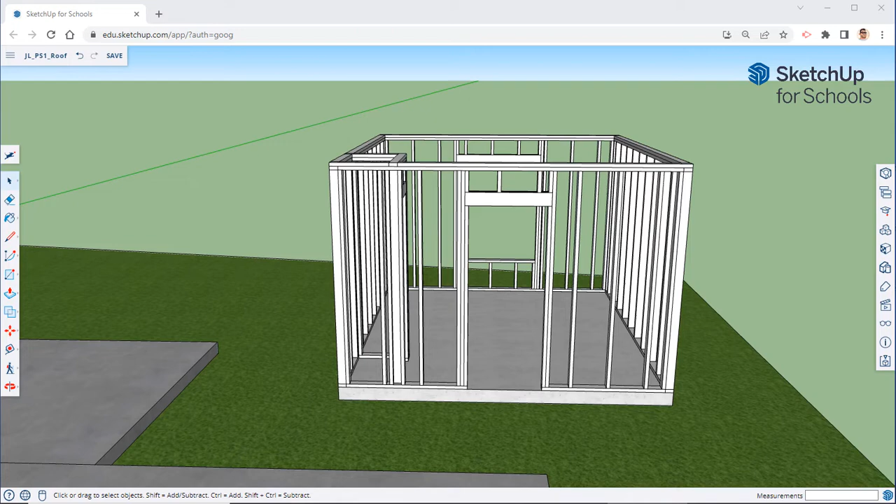Welcome back to our SketchUp for Schools project here in Framing Plan Set 1. We are finally up to our roof and are going to create the rafters and see how far we can get on framing up the roof in this episode.

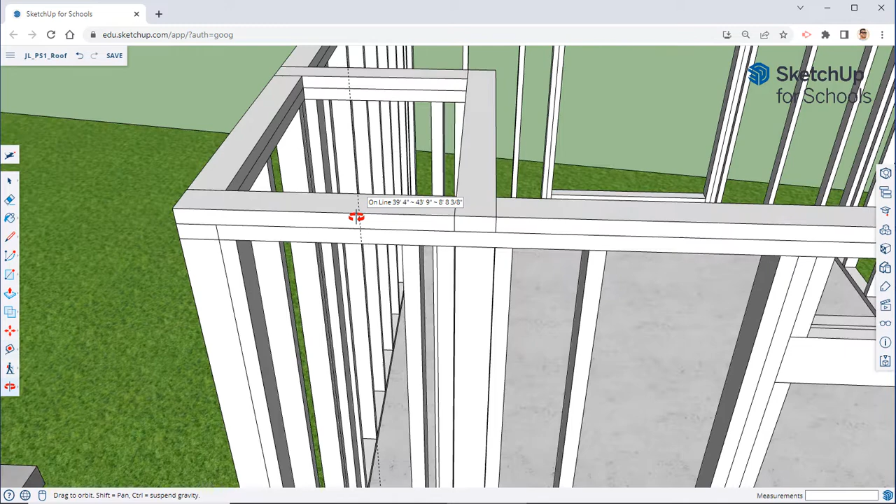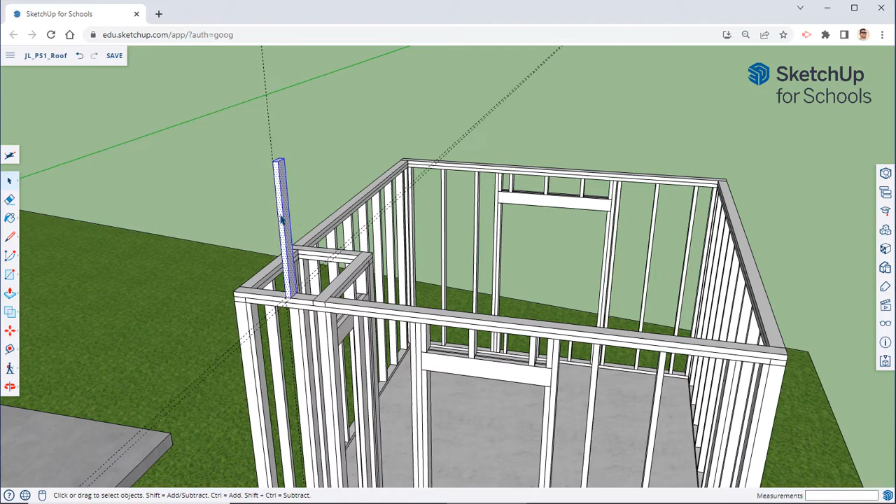To start off with, let's create this front side. So we need to first set out our first 16-inch increment. So this is where our first 2x4 is going to be. So let's draw out our 2x4 area and draw in your rectangle. Then take your push-pull tool and we're just going to bring this up to some height. It doesn't really matter how. We're going to right click on this and we're going to go ahead and make this a group.

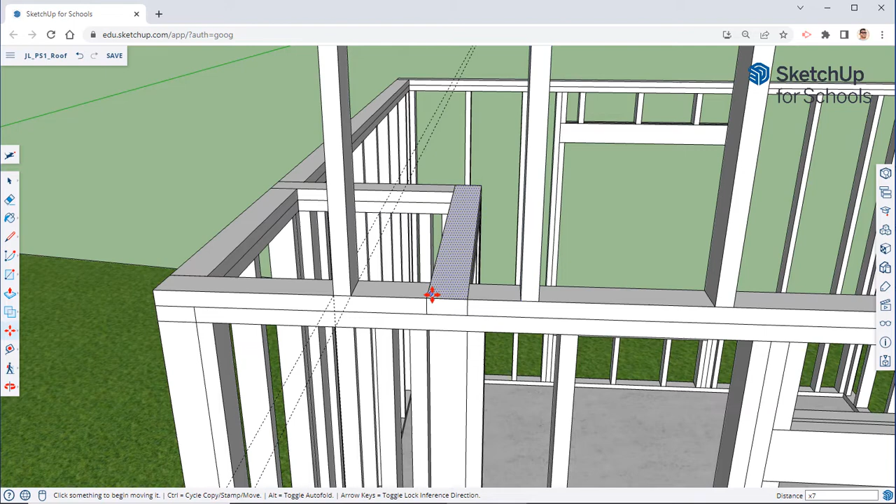So it's 16 inches from this left side to this left side. So we're going to drag it from that left side. We're going to go over, type in 16, then follow it up immediately by X, and let's do 7. Scroll out, and that should be correct. Yeah.

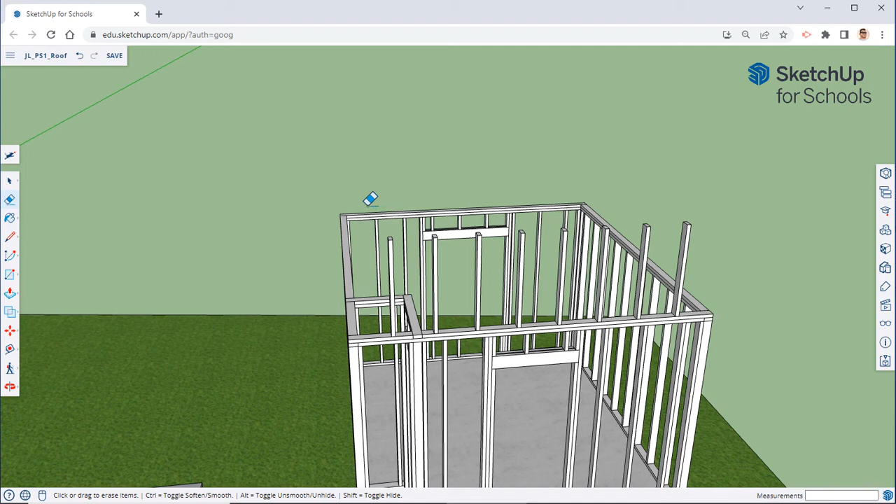So now that we have that, we need to create our slope. So in the book, it says that the slope for this roof is 7:12. So that means that over the course of 12 feet, the roof is going to go up 7. So if we come over here and we take our protractor tool, this protractor tool will let us create slopes.

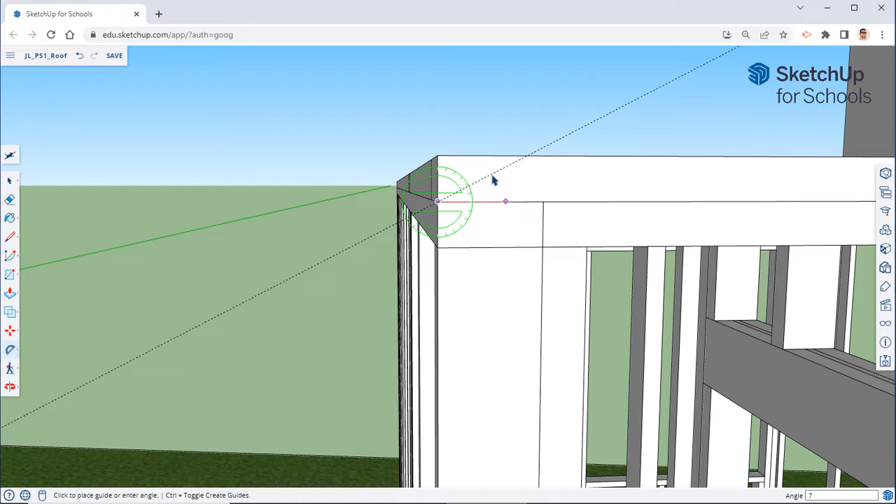And so we're going to start off by going here at the very bottom of the double top plate right here. Create our 0. We're going to go up 7:12, and you should get that angle. If you want the actual angle, it's 30.3 approximate.

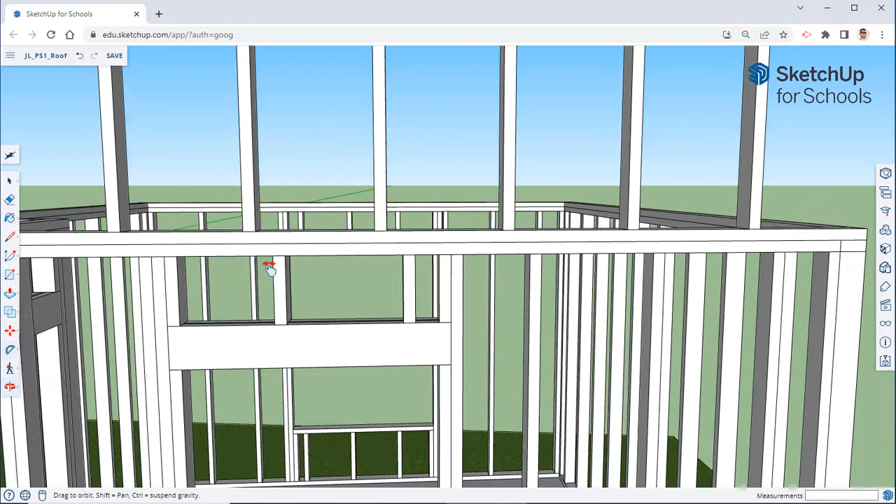Let's go on this other side and we're going to do the exact same thing. So create a starting point, drag over to the left and click in order to create our 0 mark, and then type in 7 shift colon 12.

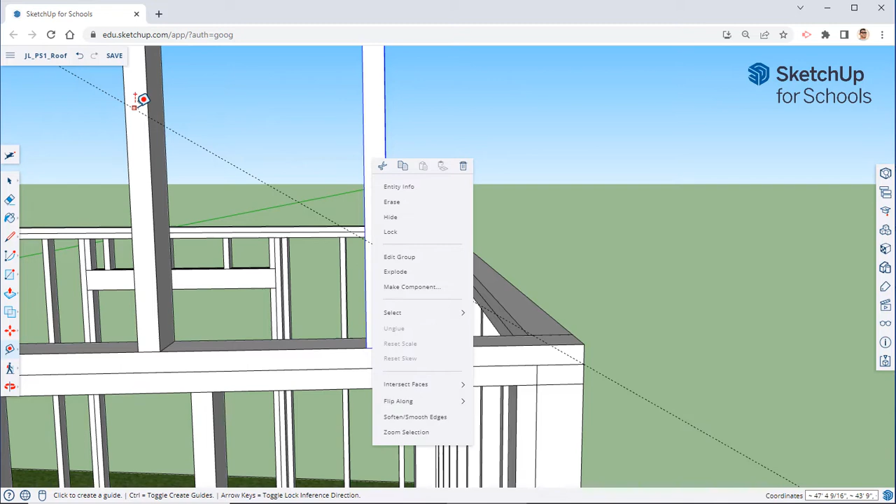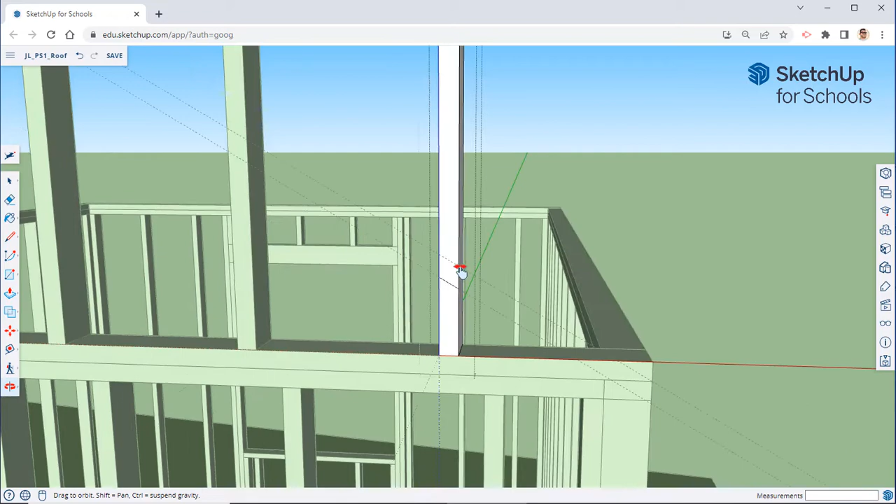So now what we're going to do is we're going to go through here and bring in our tape measure, and we need to create a guide that is 1.5 inches lower than that right there. And this bottom one is where we're going to draw our lines. So if you right click, edit group, take our line tool, and let's draw a line across there and push pull it across. And we're going to do that all the way across.

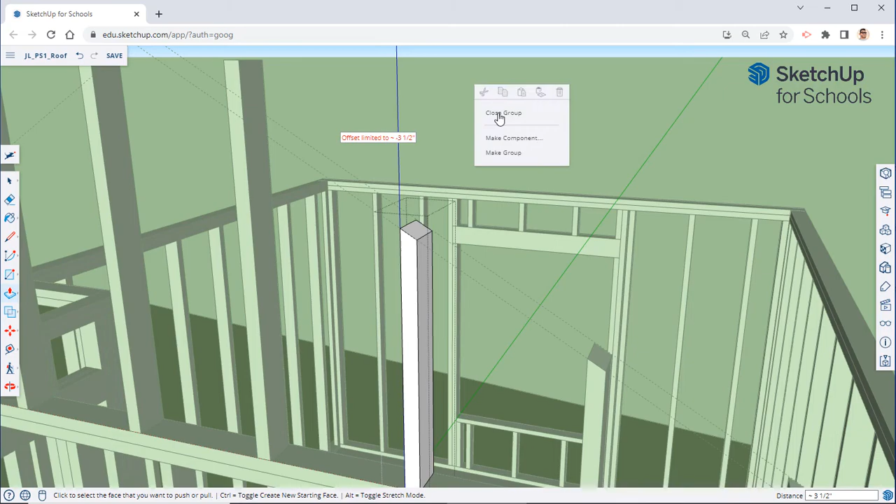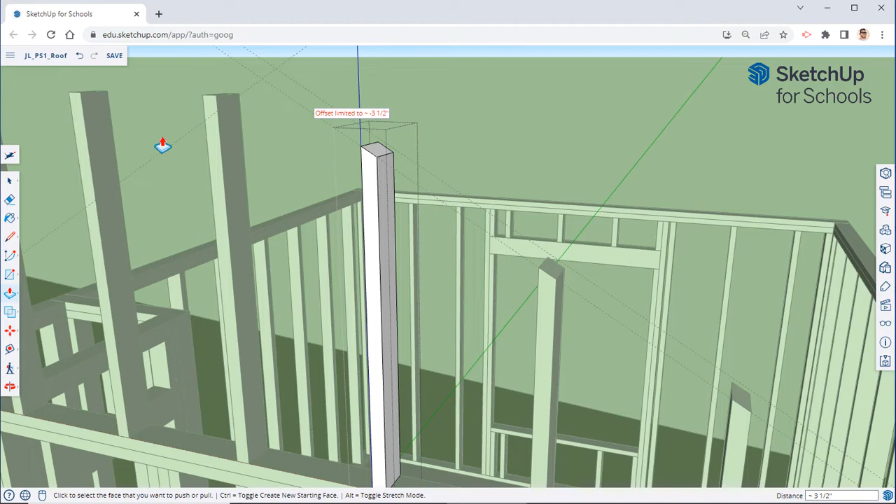We needed to use the bottom one because we're going to lay a 2x4 over top of these. So if we didn't bring it down an additional 1.5 inches, this side would be too tall, because we marked off the lower end of our rafters.

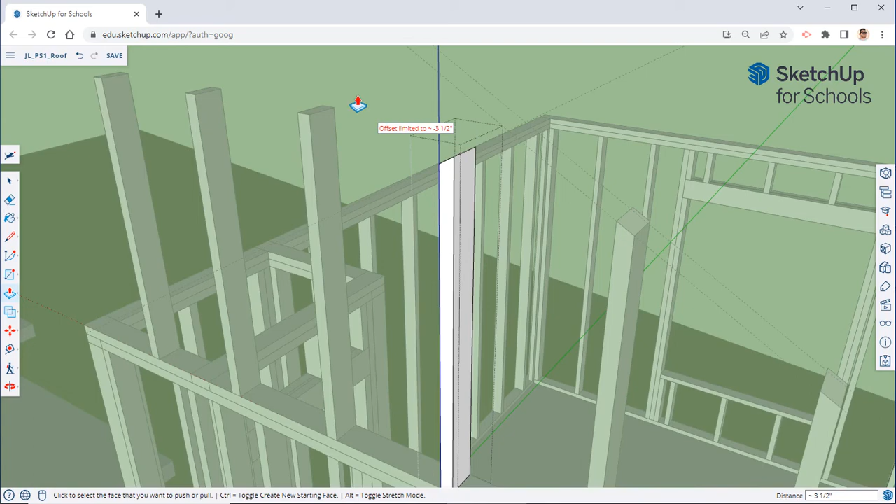Let's go ahead and do this side. And keep going across. Luckily, once we do this side and get it exactly correct, we can just copy it over to the other side. And all the middle ones are relatively straightforward and simple.

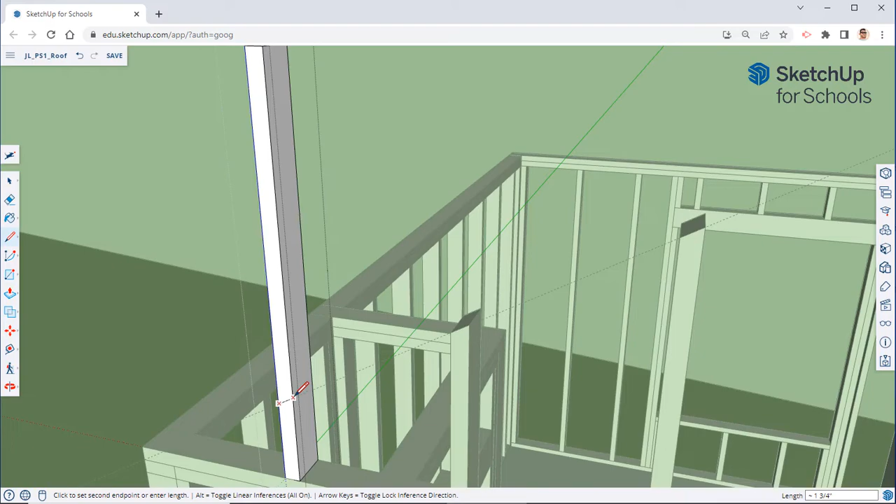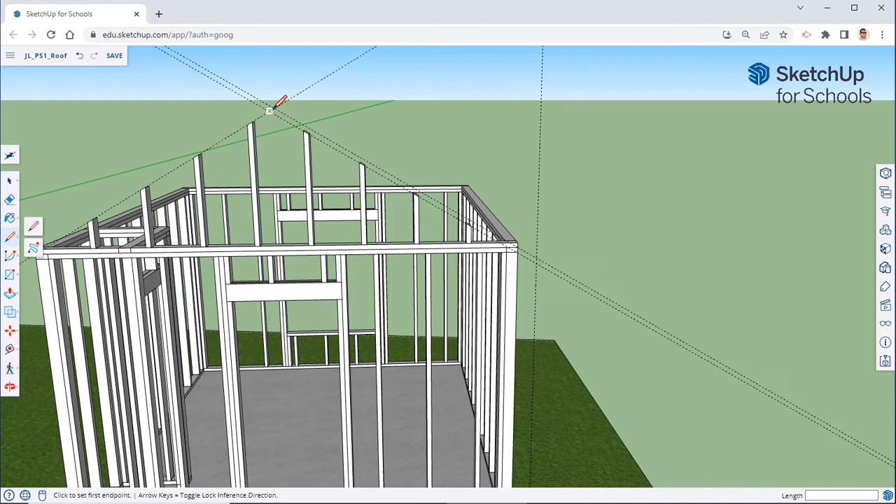All right, so now that we have that, I'm simply going to take my tape measure. I'm going to go ahead and mark off our 6-inch overhang, as that's what it says in the book. I'm going to take my line tool and I'm going to go through here and mark off the outer edge of this 2x4. Then go to the other side, take our push-pull tool and bring that all the way across, hover over that, and there is our 2x4.

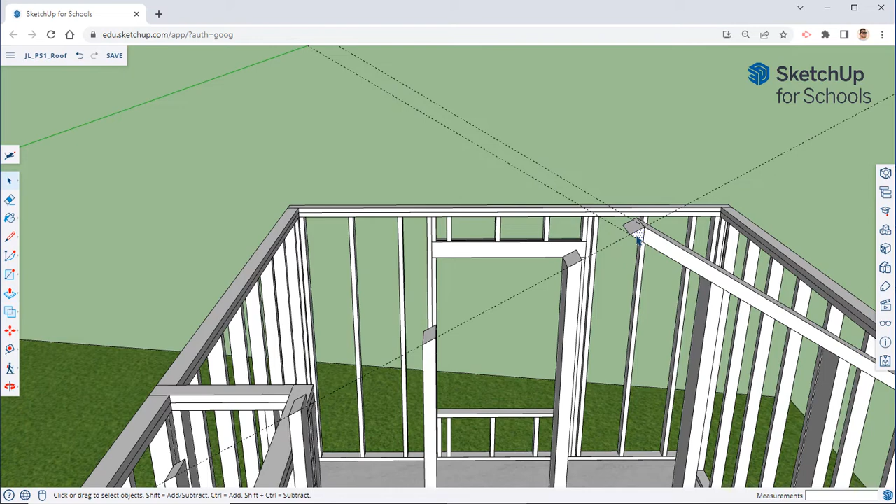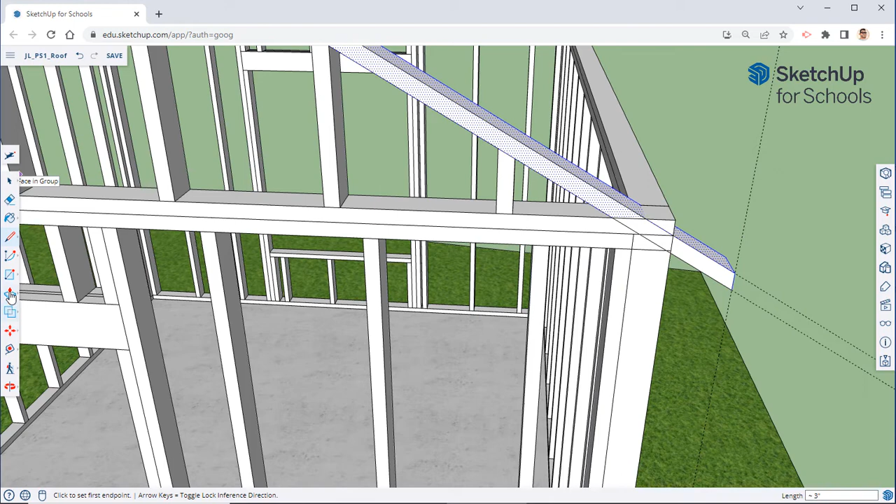Here I'm going to come in here, going to draw a line, draw a line straight down. And get rid of that part. Next, let's go ahead and we actually need to trim this. There we go. Now let's go ahead and make this a component.

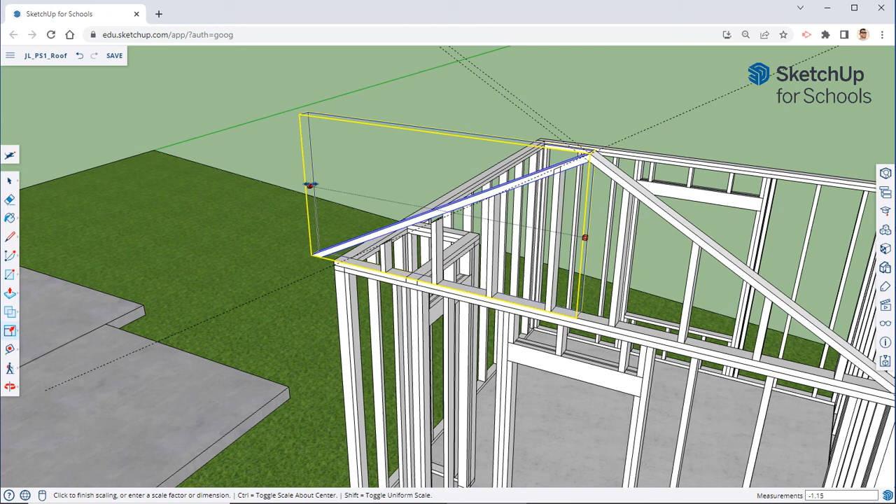Take our move tool. We're going to move it, hit Control, bring it right back down to where it was. We're going to then select our move tool, click on the scale tool, click on that board, come over here to the right, select that middle piece, and drag it over until you type in -1. And that creates our mirror.

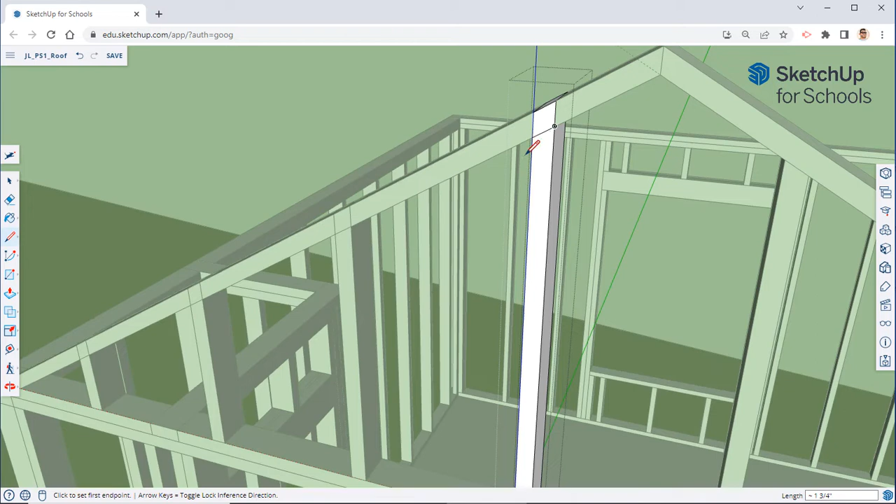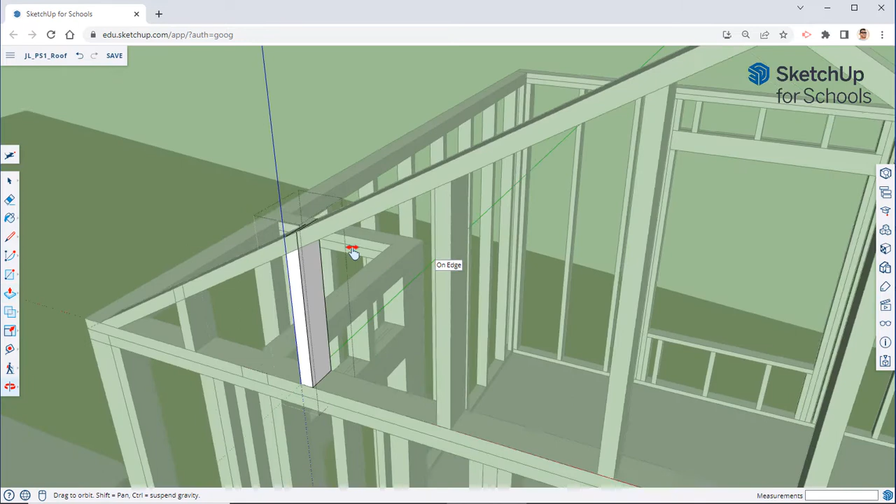So I wound up messing up here. So let's just really quick come in here and erase these top parts. And we got our last one.

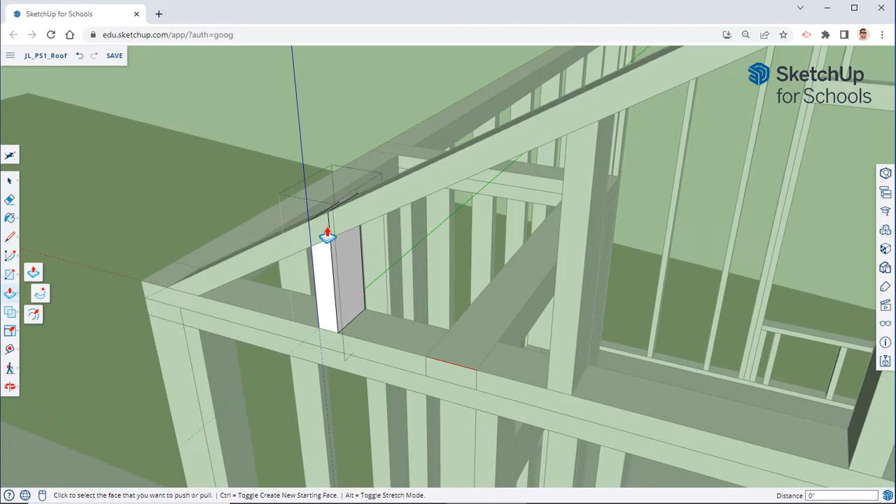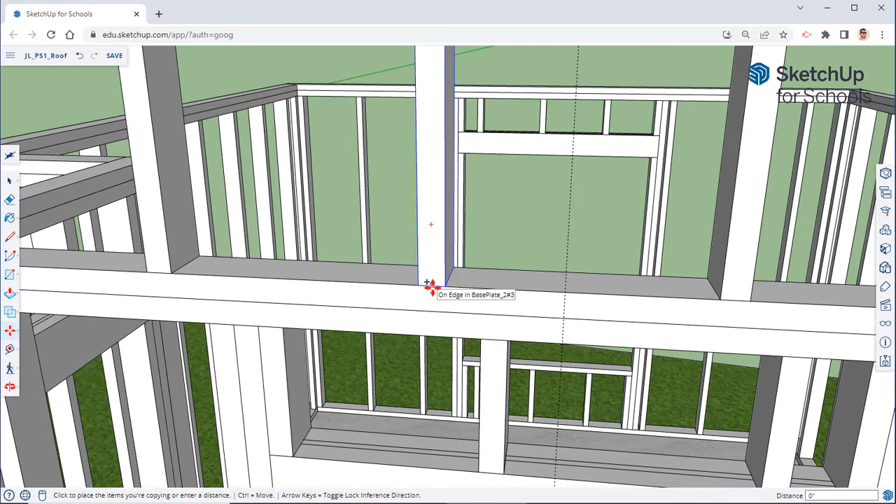There we go. I'm going to take one of these, doesn't matter which, and first let's create our midpoint. So that's the midpoint that we need for our board. So select this one. It's a group, so we don't need to worry about changing it, but select it from the midpoint, hit Control, drag it over, and place it at the midpoint of that line.

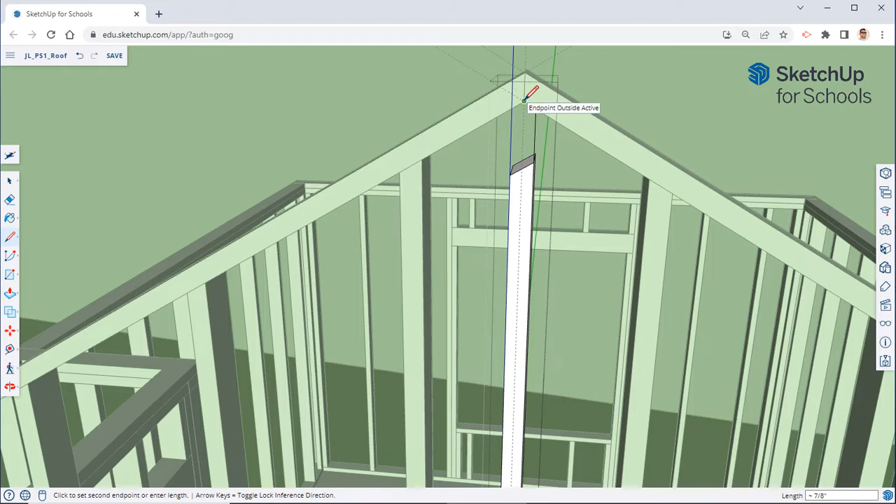Let's go ahead and edit group. We're going to take our line tool. You can use your arrow keys in order to make it snap to this axis. So hit the up arrow key for the blue. Drag that down. Rotate around using the middle scroll wheel and the shift key. And we can erase our lines.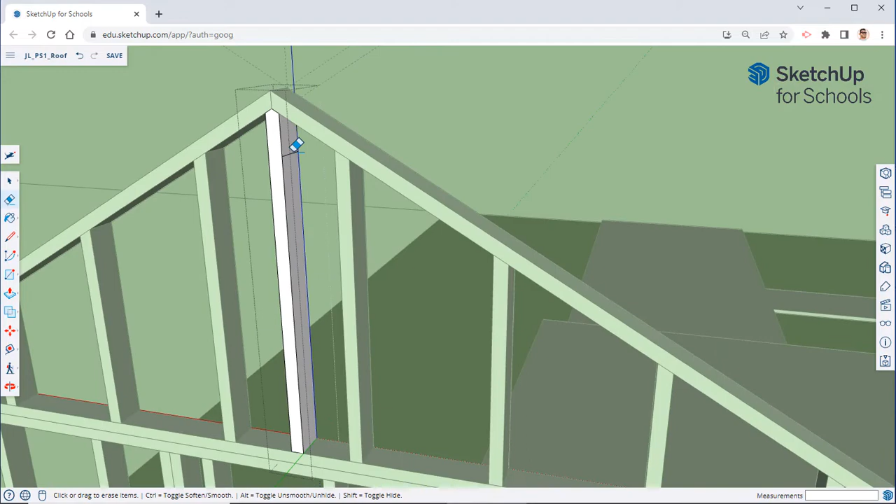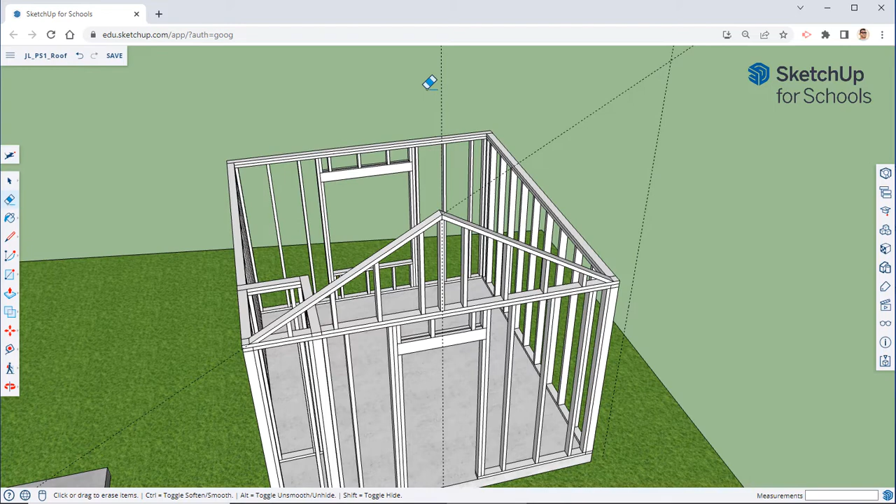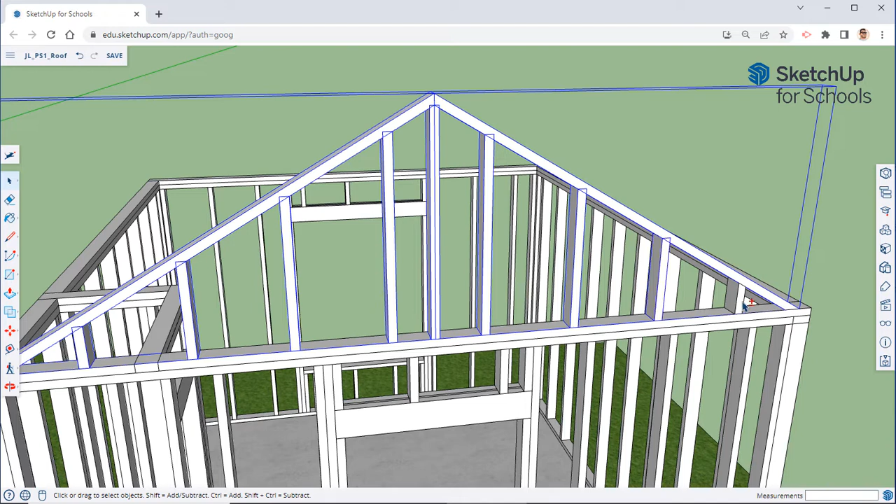Next, we do have our top rafter. But before we do that, let's go ahead and copy this over to the other side. So I'm going to erase all of these guides because we don't need them. Let's turn all of this into a group. So select your selection key, hold down Shift, and click on all of our pieces. Once you do that, right click and make all of that a group.

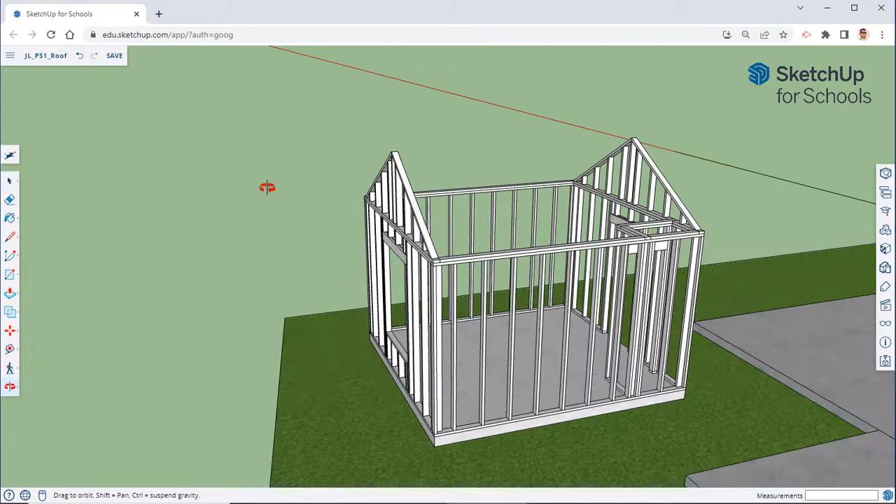We're then going to select your move tool, click on that back corner, hit Control, make sure that it is along the green axis, and put it there at the very back. So that is where we'll stop. We will come in here and we need to put our rafter across the top, so we'll modify these a little bit, and then we'll put in our common rafters going across every 16 inches.